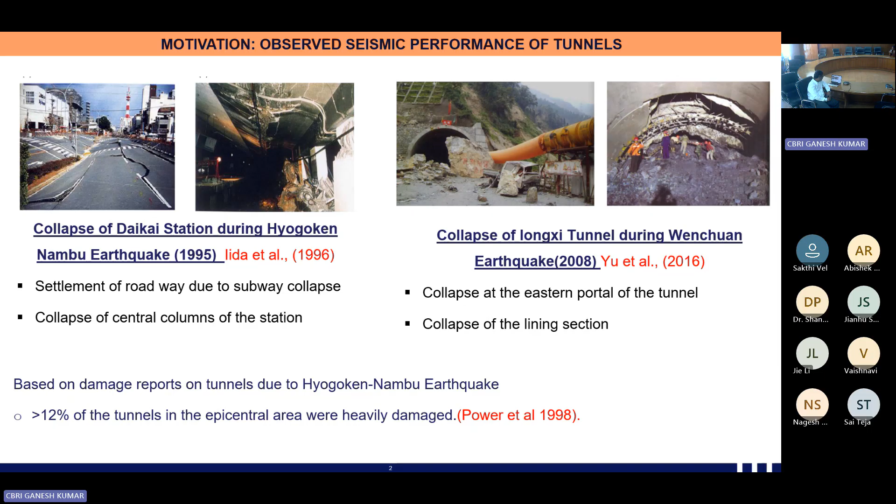So with these two things in mind, we try to understand how the tunnel would interact with soil, and how we can monitor different parameters so that we can address the tunnel soil interaction issue.

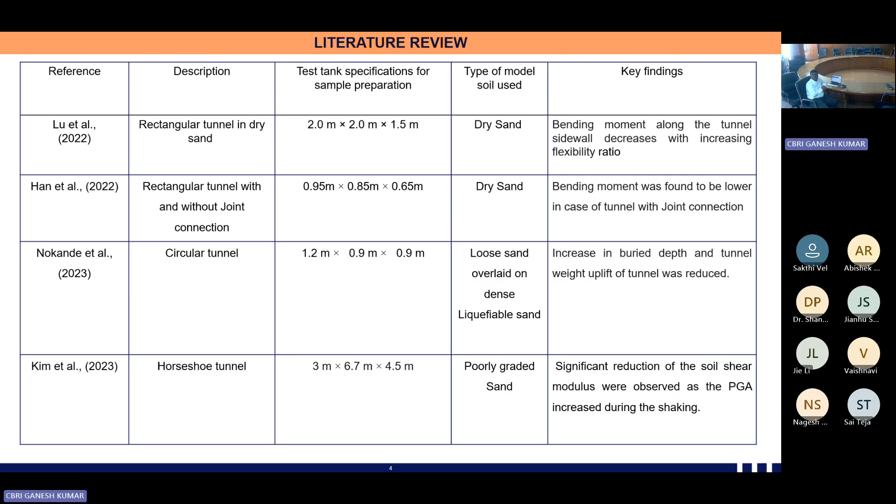So for this, we initially went with a literature review, and found that specifically in experimental studies, mostly people have done their work on dry sand and also liquefiable sand, mostly trying to assess how the bending moment of the tunnel would be affected during earthquake loading. Some of the literature also focuses on numerical studies, where they tried to address how we can reduce the seismicity of the tunnel so that it could be safe.

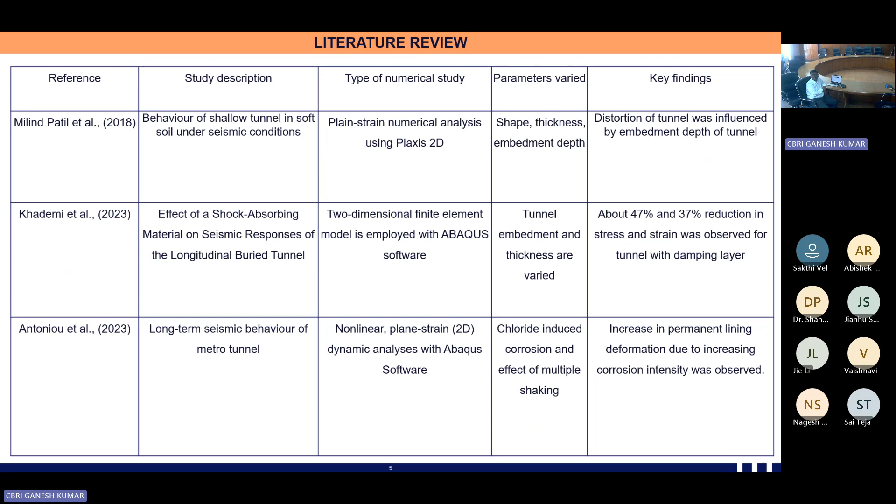So based on this literature review, I came to know that there are limited studies available specifically involving repeated shaking events. In past earthquakes such as the Tohoku earthquake, Kumamoto earthquake, and Kahramanmaraş earthquake, there are instances of how these repeated shaking events have caused catastrophic failure.

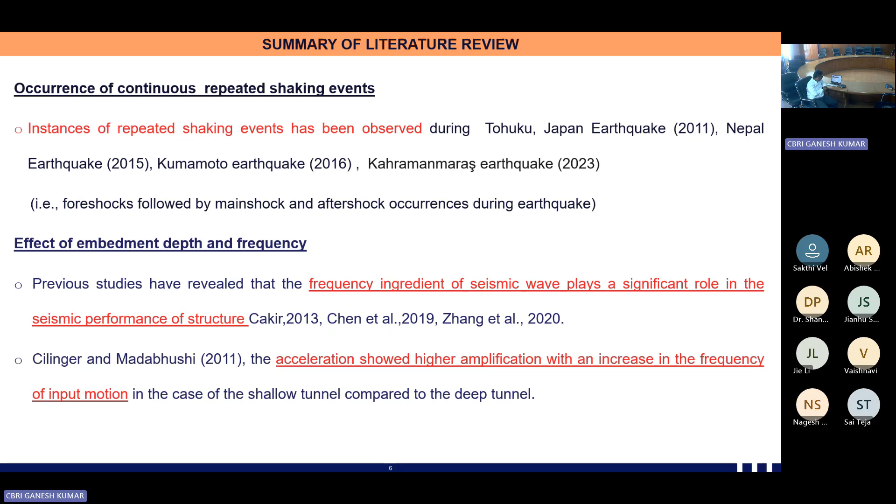We also saw from the literature that the influence of embedment depth together with frequency has played a major role in the dynamic performance of tunnels. So with these gaps in mind, we formulated our objective.

I formulated my objective, where the primary objective is to understand the tunnel soil interaction behavior under dynamic conditions. Here I primarily used the shake table and also numerical analysis. We tried to initially address how the effect of embedment depth and frequency would play a major role in the behavior of the tunnel. After completing this one set of experiments, we moved on to the influence of varying ground saturation, and how this saturation would affect the tunnel soil interaction behavior.

Finally, we moved to numerical validation of our numerical model to investigate how the effect of ground improvement would influence the tunnel soil interaction behavior.

So in test series 1, to address the embedment depth and frequency on the behavior of the square tunnel, two embedment depths with two different frequencies were chosen, with input motion of 0.2G, 0.3G, and 0.4G given as input motion.

These 0.2G, 0.3G, and 0.4G inputs are given one after the other, to replicate how foreshocks and aftershocks would influence the tunnel-soil interaction behavior.

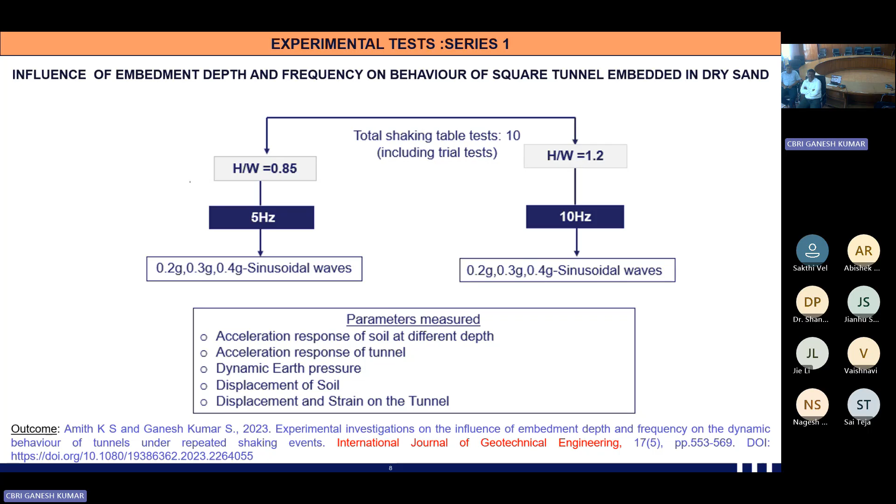In test series 2, we addressed how varying saturation would influence the behavior. For this case, we used 25 to 100% saturation, again with sinusoidal input motion, but ranging from 0.1G to 0.5G.

Further, we also moved to a circular tunnel and addressed the behavior by giving a scaled-down earthquake. All these parameters, such as acceleration response of soil, pore water pressure, dynamic earth pressure, displacement of soil, and displacement of tunnel, have been monitored.

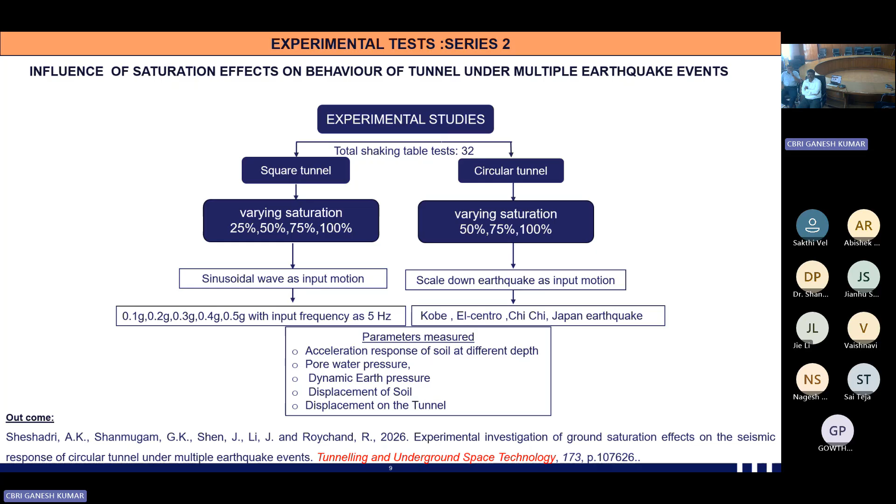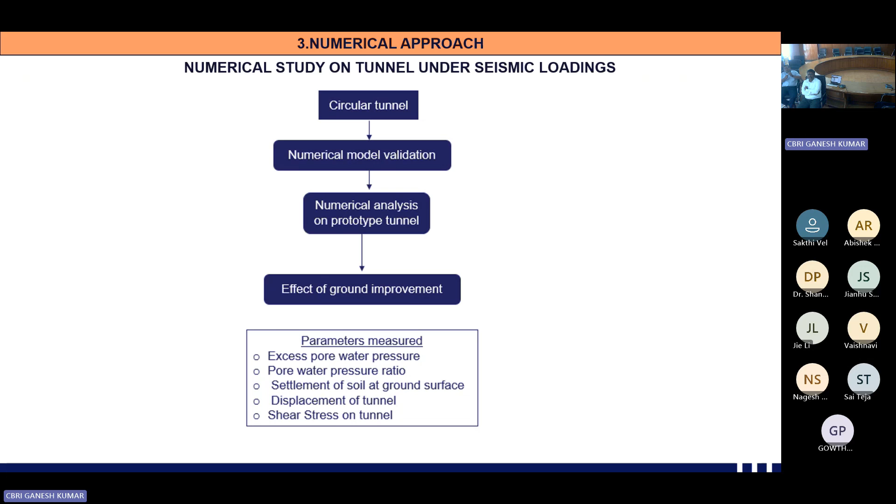To assess the tunnel-soil interaction behavior, after conducting all these tests we moved to numerical study, where initially we validated our numerical model, and then scaled up into prototype dimensions to address how this seismicity can be reduced through ground improvement.

For this experimental study, we have used poorly graded sand with a maximum dry density of 16.7 kilonewtons per meter cube.

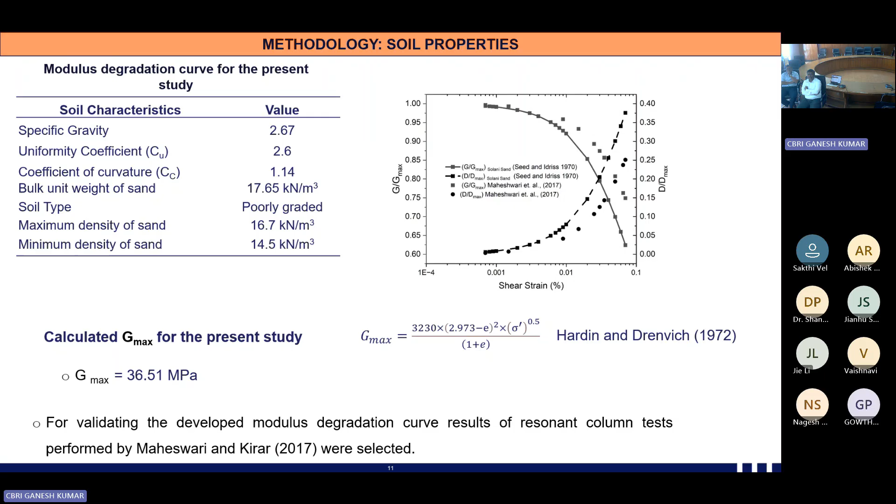We also calculated the G by G max value, which is the dynamic shear modulus, which plays a major role in dynamic tunnel-soil interaction performance. For test series 1, we used a shake table of 2 meter by 2 meter dimension with a payload capacity of 3 tons.

The acceleration range was 0.01G to 1G, with a test tank dimension of 1.7 meter by 1 meter by 0.7 meter. We fabricated our tunnel mold, with dimensions of width 270 mm and length 740 mm.

The tunnel had a thickness of 30 mm, and these are the two setups used.

For the instrumentation details, in order to measure how embedment depth and frequency would influence the tunnel-soil interaction performance, we used 3 accelerometers, 2 earth pressure cells, and 2 displacement sensors in both cases, for height-to-width ratios of 0.85 and 1.2.

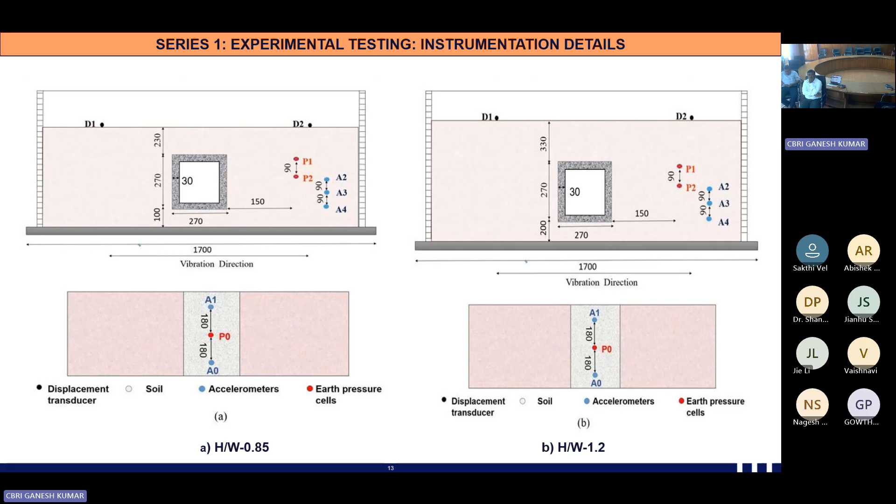While conducting the experiment, we prepared the sample by first placing the tank on the shake table, and then using a hopper to achieve homogeneity of soil preparation.

Until the height of 600 mm was achieved. After preparing the sample, input motion of 0.2G, 0.3G, and 0.4G was used, and subsequently, for monitoring displacement and strain on the tunnel, we used digital image correlation.

This digital image correlation involves speckling of images, as seen in the figure. After speckling, we take a reference image before conducting the test, and during the test we take subsequent images continuously, called deformed images.

The reference image and deformed images are correlated together so that we can calculate the displacement and strain.

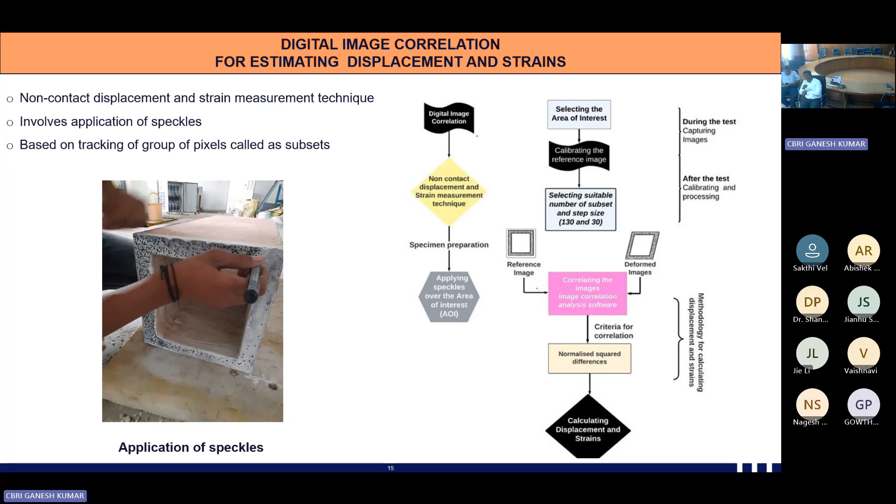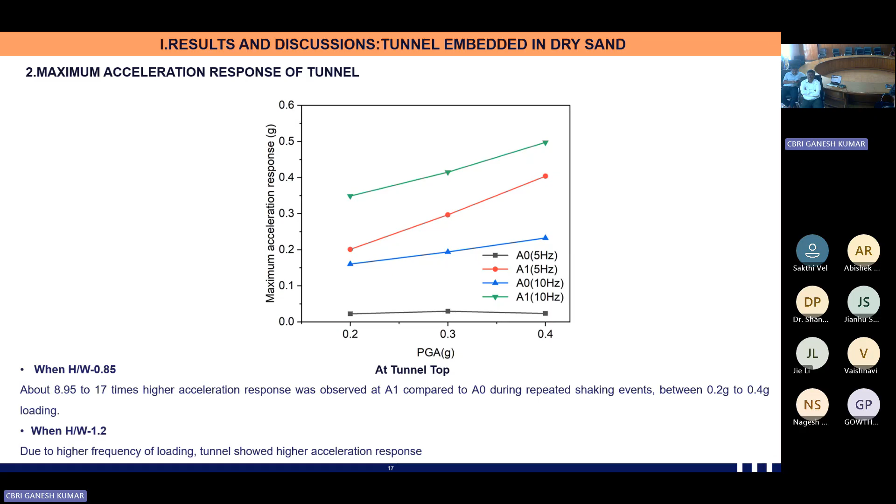For the acceleration response on the tunnel, 2 accelerometers were placed on the longitudinal dimension at the top of the tunnel, and we could see that the front end of the tunnel had higher acceleration response compared to the rear end of the tunnel.

We also measured the maximum acceleration response within the soil, and we can see that because of soil nonlinearity and non-uniform densification, the maximum acceleration response is higher at the top and lower at the bottom.

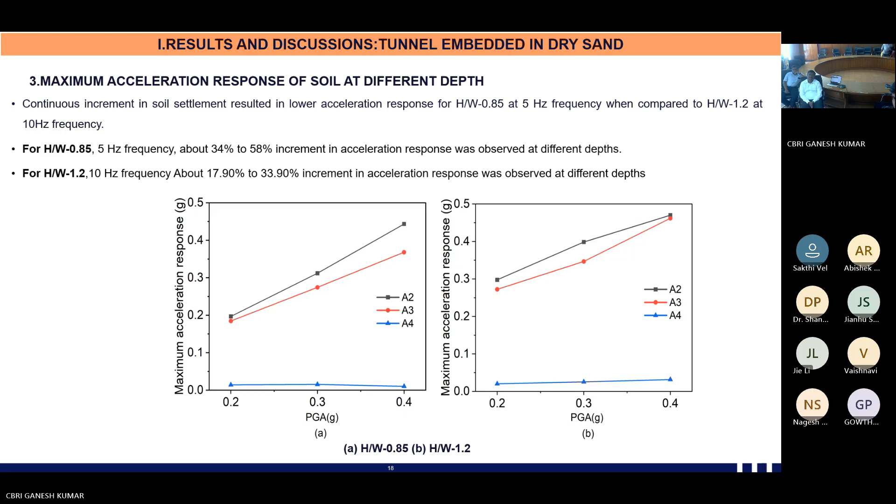Finally, for this objective, the 5 Hz loading frequency during repeated shaking events influenced the increment in soil densification. Because of the load sharing mechanism between the soil and tunnel, about 14.9 to 58% increment in dynamic earth pressure was observed during 0.3G.

And for the 0.4G shaking, dynamic earth pressure reduced. This could be due to the maximum embedment depth and also the overburden cover, which is affecting the tunnel-soil interaction behavior.

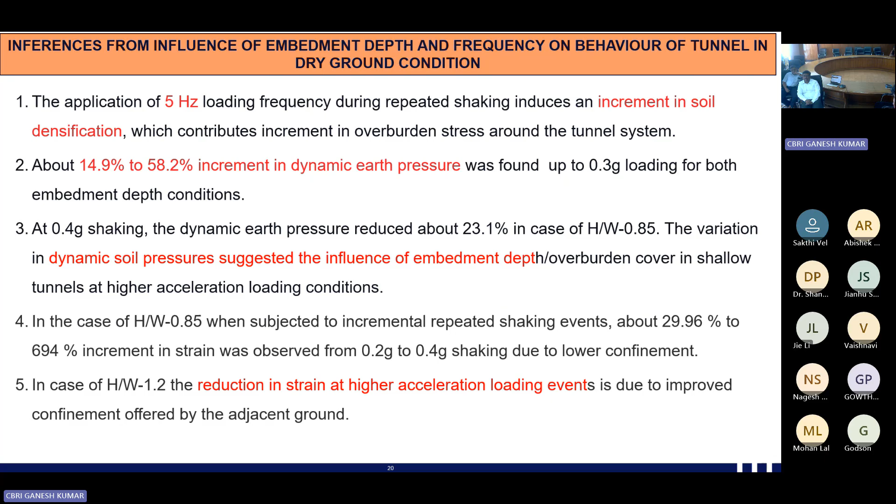Further, for the height to width ratio of 0.85, about 29.96 to 694% increment was observed in strain, meaning that with input motion, because of lower confinement, comparatively higher strain was observed. For height to width ratio of 1.2, reduction in strain is observed, due to the improved confinement offered by the adjacent ground.

After completing this one set of experiments, we tried to understand how the saturation of soil would influence the tunnel-soil interaction behavior. For that, initially we fabricated the square tunnel, and then varied the saturation of ground by theoretically estimating the water content required for achieving the soil sample preparation.

As mentioned previously, 0.1G to 0.5G input motion was used to simulate the influence of aftershock and foreshock events.

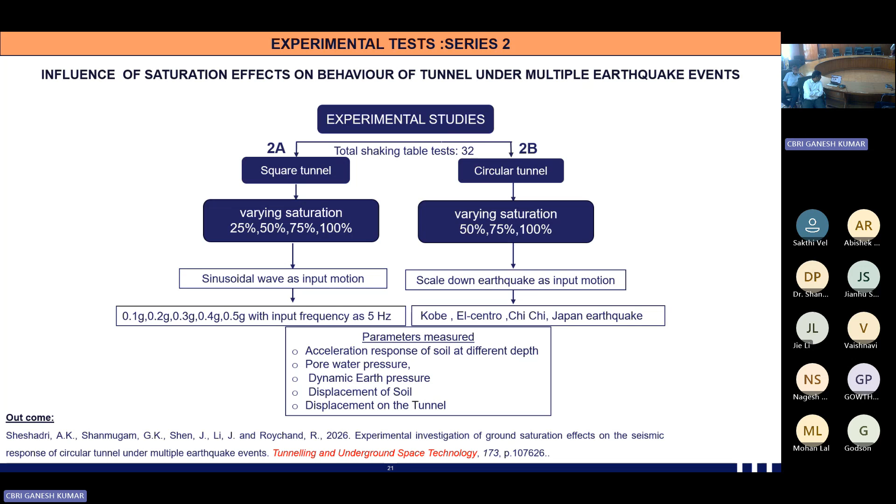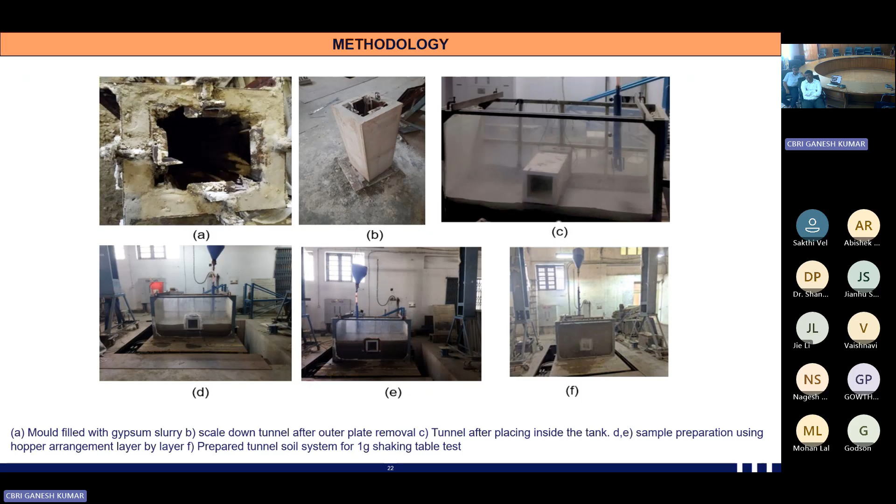For the square tunnel, we molded the sample with 270 mm by 270 mm dimensions, and after sample preparation of one layer, we placed the tunnel, and through wet sedimentation technique, completed the soil sample preparation. Then we used instrumentation of 2 accelerometers, 4 pore pressure sensors, and 1 displacement sensor to monitor tunnel-soil interaction behavior.

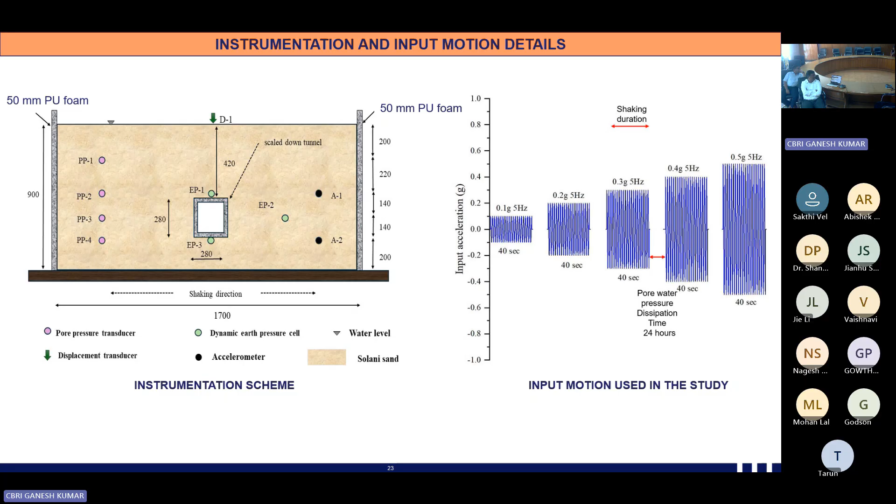The results show that for the 25% saturation case, no significant improvement is observed. Even for 50%, no excess pore pressure has been developed. But for the 0.2G shaking, subsequent loading showed slightly higher pore pressure, although at the top there was no significant pore pressure development.

But for 0.3G and 0.4G shaking, because of shaking history and also higher peak ground acceleration, both together, along with shaking duration of 40 seconds, played a major role in developing higher pore water pressure during 0.3G and 0.4G shaking.

This continued even during 0.5G shaking, and comparatively 75% saturation ground influenced more pore water pressure compared to all other cases.

We could see that because of this development of pore pressure, the displacement of tunnel increased with input motion. Physically we observed a longitudinal crack along the tunnel for the case of 50% saturation, and for the case of 75% saturation, complete collapse of tunnel along with heave was observed.

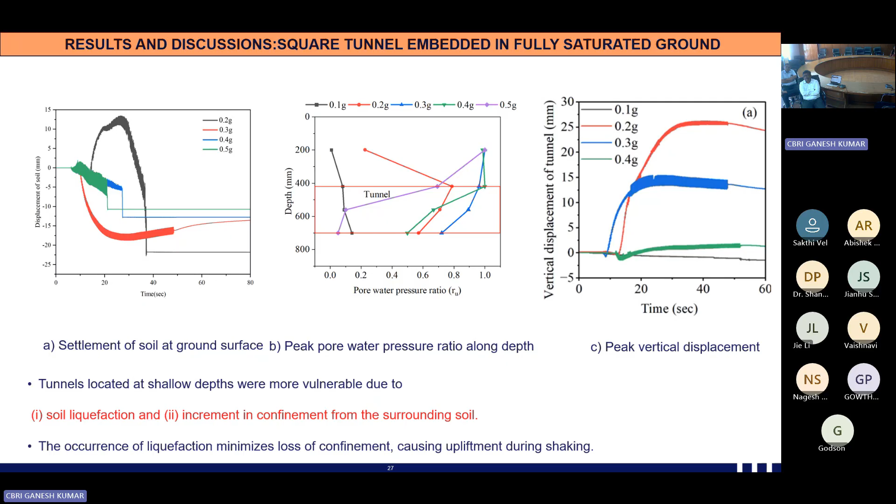But during subsequent 0.2G to 0.5G shaking, because of complete saturation, vertical displacement of tunnel from 0.2G to 0.4G was observed in the case of 100% saturation. Here, primarily, the shallow embedment depth played a major role for tunnel upliftment.

So from this, we could conclude that the influence of shaking history and duration of shaking along with the peak ground acceleration played a major role in increasing the pore pressure response.

Also, for the shallow confinement characteristics and variation in situ stresses, displacement of tunnel increased both with increment in soil saturation and incremental shaking events. But for the case of 100% saturation, complete liquefaction occurred during 0.2G to 0.5G shaking, and the variation in situ stresses caused the tunnel to uplift.

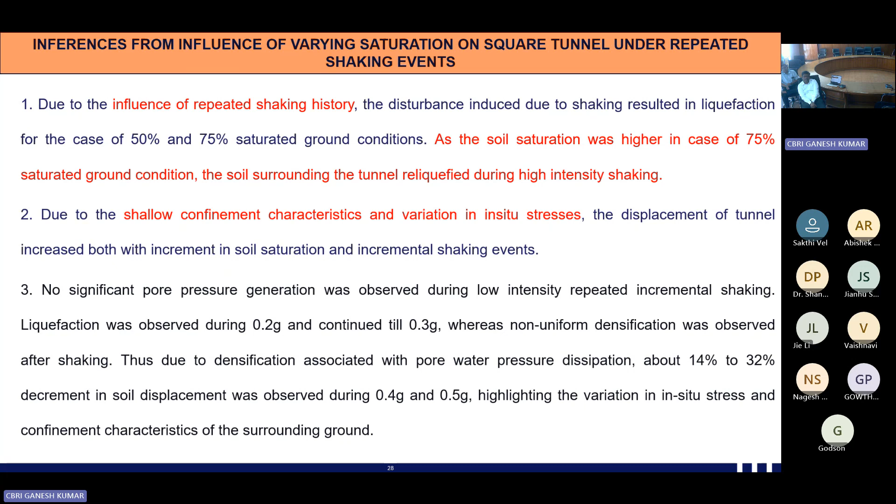After this set of experiments, we moved to understand how scaled down earthquake motion could affect tunnel performance. So instead of sinusoidal waves, we used scaled down earthquake motion, and here also we varied 50 to 100% saturation as test cases.

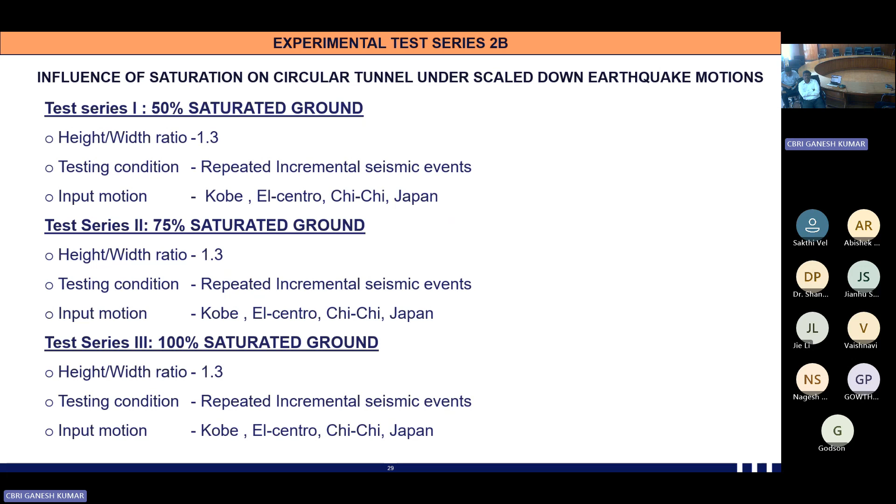Further, we fabricated our tunnel model of dimension 195 mm internal diameter and 245 mm external diameter, with the length of tunnel as 740 mm.

In order to scale down this tunnel, scaling laws were used, and accordingly, the time of input motion and frequency was scaled down and given as input motion.

These are the instrumentation details where 4 accelerometers and 4 pore pressure sensors have been used, along with 2 displacement sensors.

We also prepared the soil sample similar to the previous cases, where until the desired height of 850 mm was achieved, we prepared the sample with calculated water content.

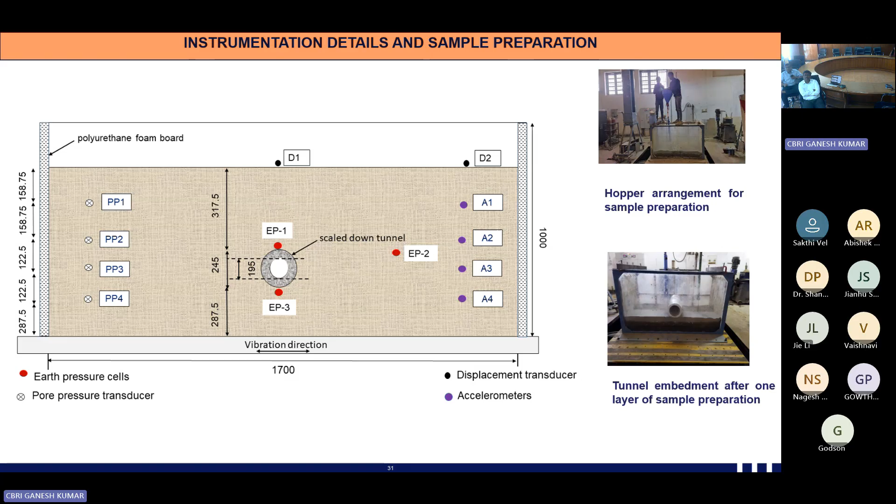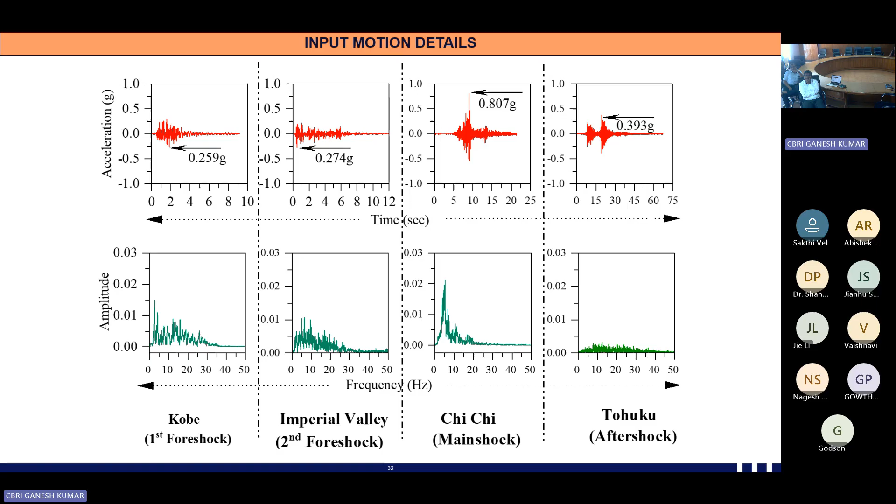This figure shows the input motion details, where in order to replicate two foreshocks, a main shock and aftershock events, we have used the Kobe earthquake, Imperial Valley earthquake, Chichi earthquake, and Tohoku earthquake. Here we can see that incrementally the duration is increased from Kobe to Tohoku earthquake.

After conducting the experiment, we could see that at the tunnel embedment depth, a slight reduction in acceleration response has been observed, and also the 100% saturation test cases tend to liquefy, due to which lower acceleration response was observed. The primary reason for reduction in acceleration response is that at mid depth, disturbance due to shaking causes densification, due to which slight reduction in tunnel's acceleration response has been observed.

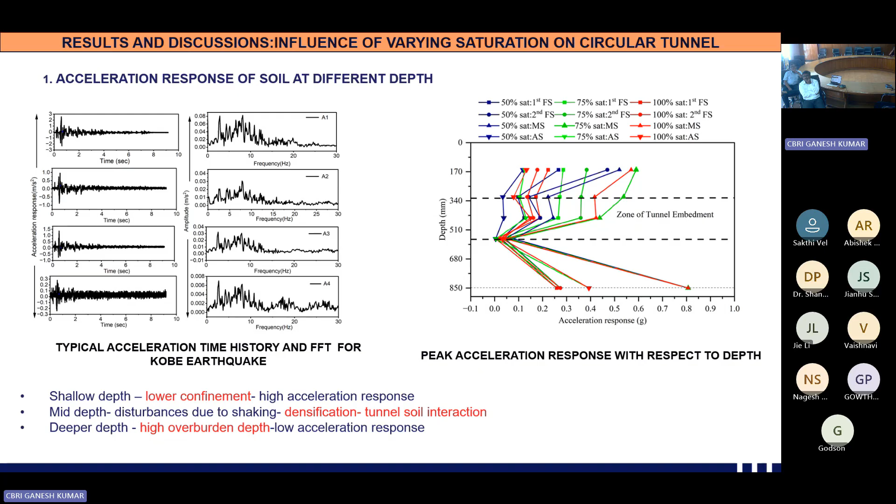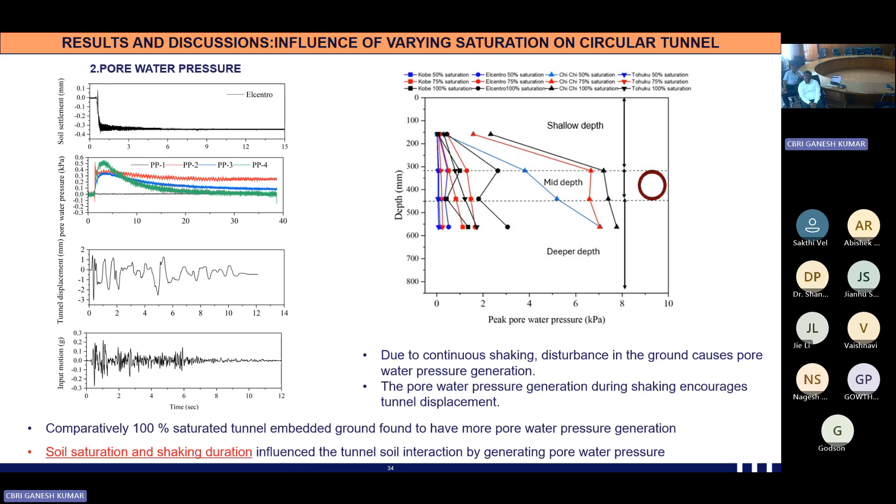These tunnel-soil interactions could also be interpreted using the pore pressure response, where from top to bottom the pore pressure is increased, primarily due to the overburden pressure. We measured the displacement of tunnel, and we could see that for the initial case of Kobe earthquake, not much significant displacement was observed.

For the case of the Tohoku earthquake, comparatively lower displacement is observed. This is primarily due to the influence of shaking history, which influenced the densification of ground during the main shock event, due to which lower displacement is observed for the case of Tohoku earthquake.

From these results, we can conclude that primarily the shaking duration and also the peak ground acceleration along with the shaking history played a major role, and the soil saturation significantly influenced the dynamic performance of the tunnel. From the estimated pore pressure ratios, it is evident that the influence of saturation is affecting the tunnel-soil interaction performance, which significantly led to soil liquefaction.

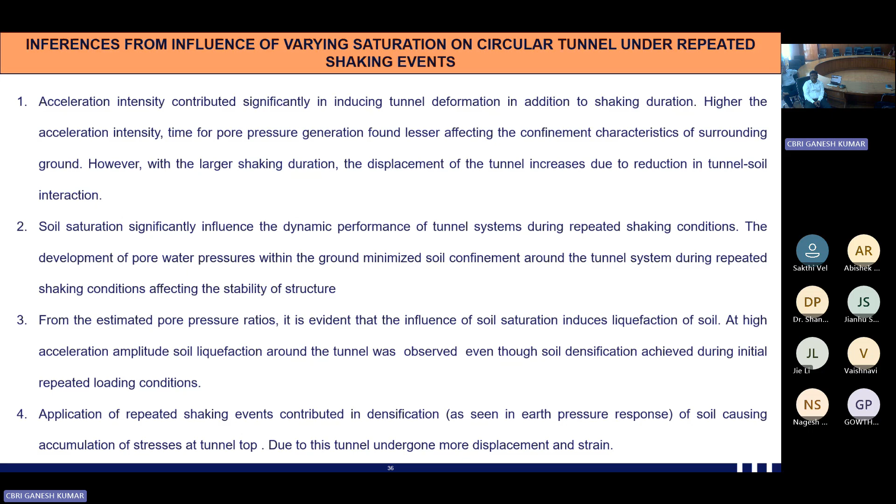This is the end of the test series through experiments, and after completing all this, we moved to the numerical approach, where we validated our numerical model through the UBC3D-PLM model, and we measured parameters such as excess pore pressure ratio, settlement of soil, and displacement of tunnel, similar to the previous cases.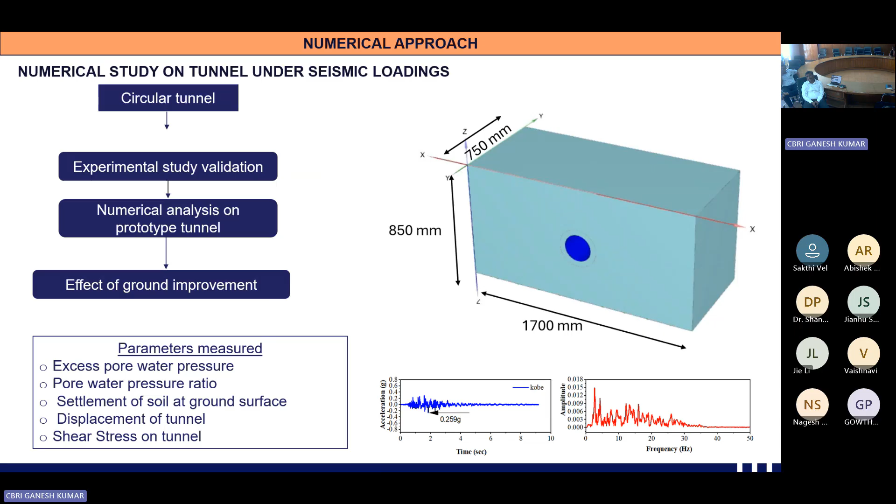For conducting this numerical study, we used an interface reduction factor of 0.66 between the tunnel and the surrounding soil. To model the tunnel, we used a plate element, and the parameters associated with the constitutive model were calculated based on the SPT N value, which is correlated with equations given in the Plaxis 3D tutorial or constitutive material model manual.

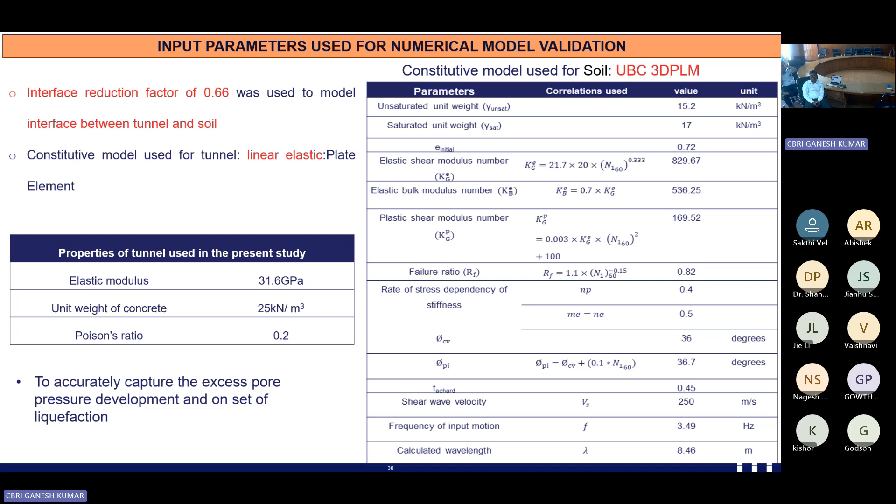After calculation of all this, we did several trials and arrived at a certain set of results, where we could see around 10 to 15% variation between the numerical model and experiments.

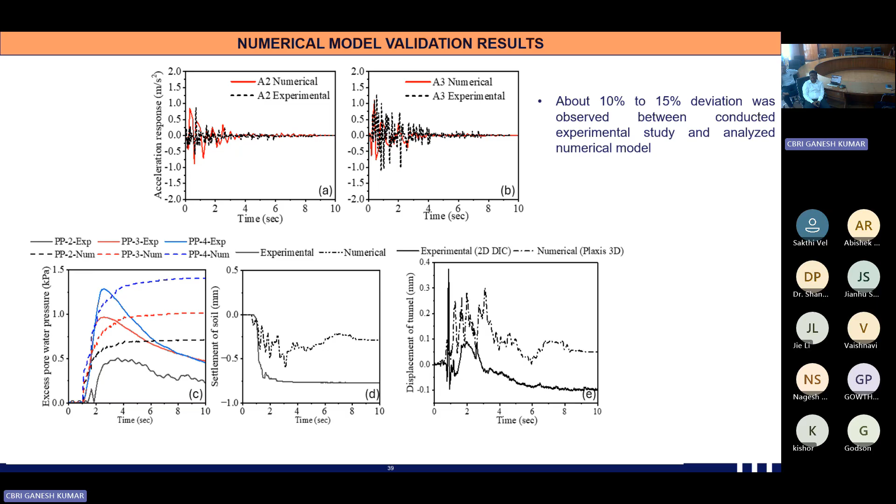After validating the numerical model, we moved to scale up the model, and according to a scaling factor of 1:20, we converted everything into the prototype. We tried to apply the boundary conditions of a viscous boundary along with a compliant base at the bottom in order to simulate the dynamic input motion. These Rayleigh damping coefficients were calculated based on the wavelength of the input motion.

Similar to the validated model, we calculated the input parameters required for modeling the tunnel.

To reduce the seismicity of tunnel along with the soil, we used stone column technique, where all the parameters have been calculated based on the SPT N value, which I mentioned in the initial slides, and Poisson's ratio of 0.2 with elastic modulus of 3 x 10^4 MPa have been used for the tunnel model.

This is the stone column configuration we used, where for 5 meter and 10 meter depth, two variations were done, and two rows of columns and 8 rows of columns have been installed, and we tried to see how we can reduce the upliftment of tunnel which we observed in previous experiments.

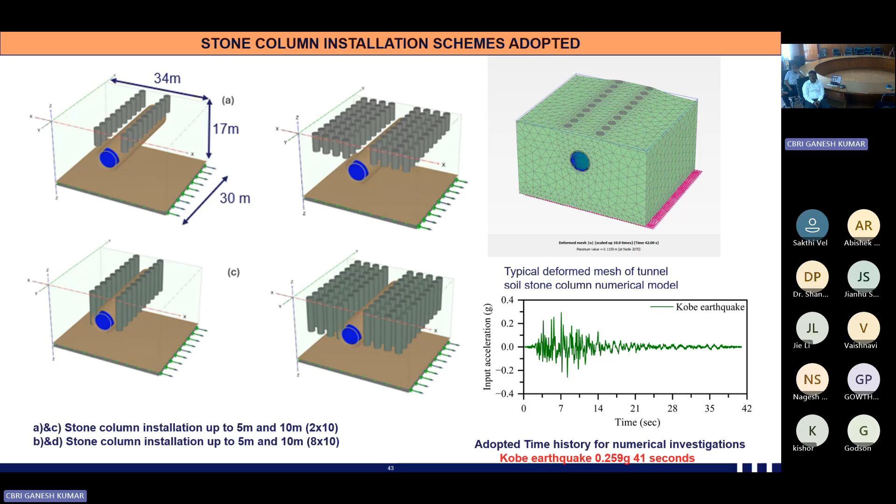We can see here that for the case of 10 cross 2 configuration, no much reduction in soil settlement is observed, but for the case of 10 cross 8 arrangement, we could see drastic reduction of up to 39%.

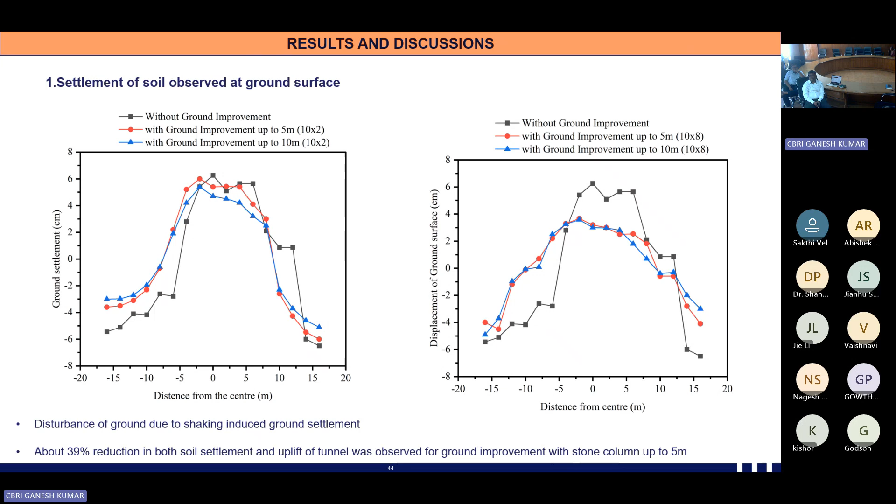But for the case of subsequent 10 meter depth, although up to 10 meter we could see reduction in pore pressure, still at the bottom there was no significant improvement.

So further, we varied our stone column configuration where for the case of 5 meter, there was no improvement, but for the case of 10 cross 8 configuration for 10 meter depth, stone columns installed at 10 meter depth, almost significant improvement was observed.

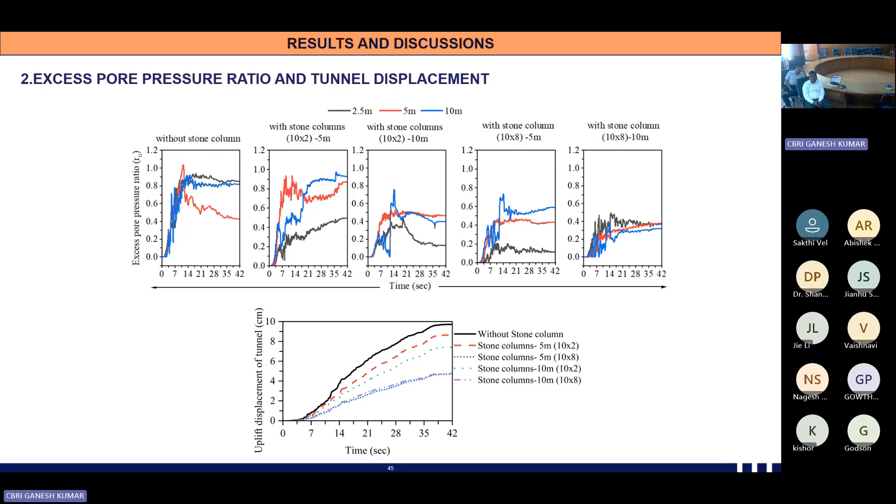This can be validated through the displacement of tunnel, where for the case of stone column installed at 10 cross 8 configuration, it significantly reduced the upliftment of tunnel. So from this numerical investigation, we could see that 10 cross 8 arrangement is ideal if we install the stone column up to 10 meter depth.

The major conclusion from this research is primarily for the case of dry ground conditions, both frequency and shaking history and embedment depth play a major role. And due to the influence of shaking history and longer shaking duration, for the case of varying saturation ground, development of pore pressure has taken place.

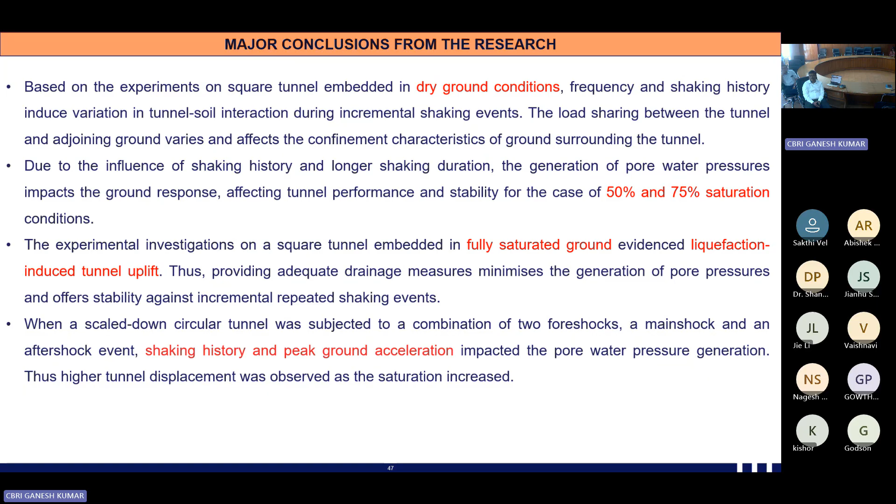And for the case of fully saturated ground, this has induced tunnel uplift, which we tried to address in our numerical study. For the case of circular tunnel subjected to a combination of foreshock, aftershock, main shock, and aftershock events, primarily shaking history and peak ground acceleration were major factors affecting tunnel displacement.

From this, we can also say that through numerical study, both densification and drainage effect of stone column can be used effectively to mitigate the tunnel uplift and improve the performance of tunnel.

We have just started exploring how we can use numerical simulations effectively to simulate ground improvement, but still more work is required where the spacing of stone column, influence of stress concentration ratio, and several other factors have not been considered in our study.

Also, the validation has only been done for a single earthquake, but we can also consider multiple shaking events in our numerical study to further enhance our work.

There are some future scope of my present work, where the observed performance or parameters can be used for understanding real-time monitoring of tunnel structures.

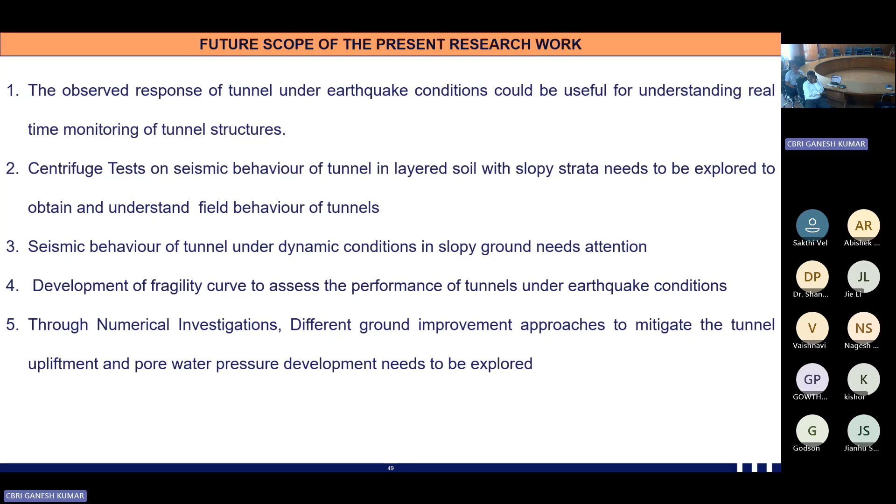We can also develop a fragility curve based on the conducted experimental study and numerical simulations, and we can come up with the vulnerability characteristics of these tunnels.

These are some outcomes of our research, where initially the review paper was published in European Journal of Environmental and Civil Engineering. Then one research paper was published in International Journal of Geotechnical Engineering. Further, recently my work on circular tunnel under multiple shaking events was published in Tunnelling and Underground Space Technology.

One more paper is currently under review, where we revised and submitted our manuscript to the Journal of Earthquake Engineering.

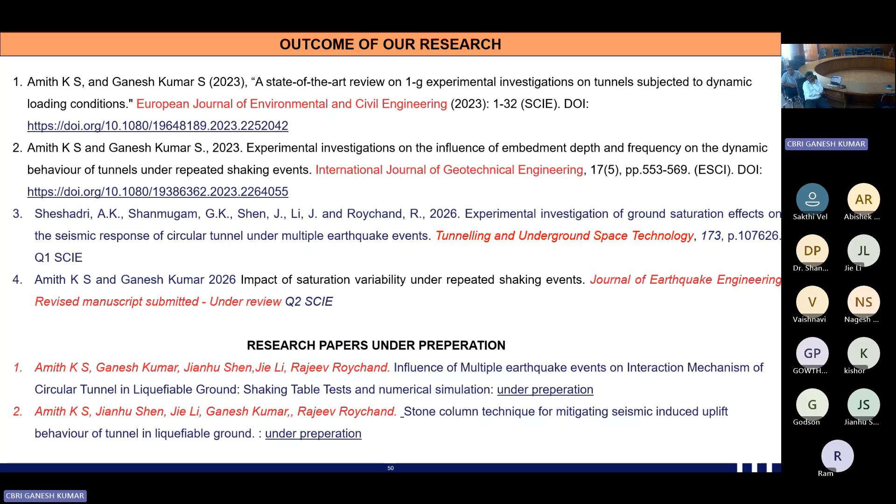Two more papers are under preparation. Three book chapters I have completed by attending conferences, and I have also got 3 conference papers. With this, I would like to conclude my topic on tunnel soil interaction behavior.

I would like to thank all of my supervisors, both at AcSIR and RMIT, along with LAC members, director, HOD and scientists at CBRI. I would also like to thank our thesis examiners for giving me significant review on how the thesis can be improved.

I would also like to thank the technical support given by the BIS company for shake table facility, along with Abhishek, director of Pyrodynamics, who helped me understand how DIC can be effectively used for measuring displacement and strain. Also, in validating on the online platform I came across a lot of difficulty, so people from Bentley helped me online, and a lot of discussions occurred. I would also thank them.

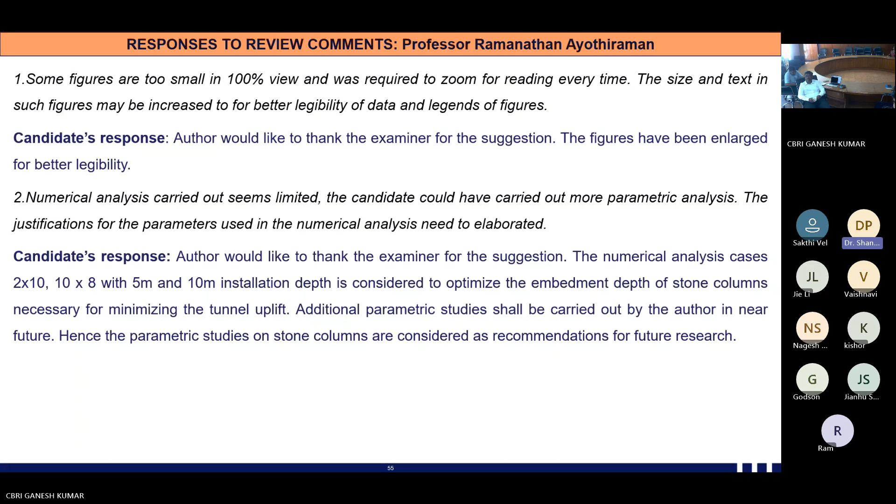Can you show your model test diagram? And can you tell me how much space is there along the longitudinal direction of the tunnel?

In this figure, the placing of tunnel figure, you can see that 2 accelerometers have been placed. Along the length direction of the tunnel, from the boundary to the tunnel boundary, what is the distance you have allowed? Professor, are you asking about the distance between the accelerometers or from one end to the other end? One end to the other end. One end to the other end is 750 mm. And in between, you have to put something — what is that?

That's a kind of membrane where to arrest the significant disturbance, we try to use that one, but still we could not able to control the movement.

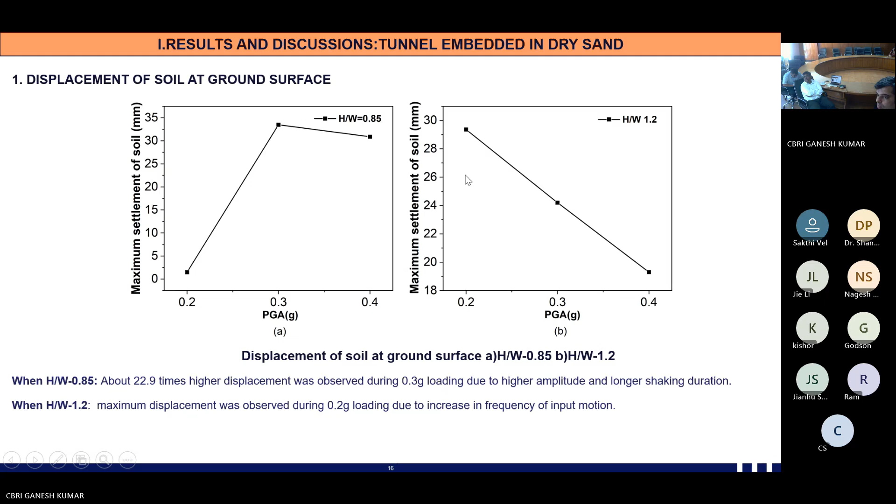Can you show that with your cursor, the distance you are telling? From this end to this end, the distance is 750 mm. And where does your tunnel end? It is attached to the perspex wall.

In that case, how is it a three-dimensional model? It's not, it is a plane strain model. Actually, even though it can be considered as a plane strain model, here we have given some liberty to movement. We have not completely arrested the tunnel movement. Before conducting these tests, we did several other tests where we tried to reduce the movement, but still we could not arrest it. We tried to simulate the plane strain condition, but physically it was not possible to arrest the movement completely. So because of the overburden soil and the continuous shaking of around 40 seconds, we observed variation in acceleration response between two locations.

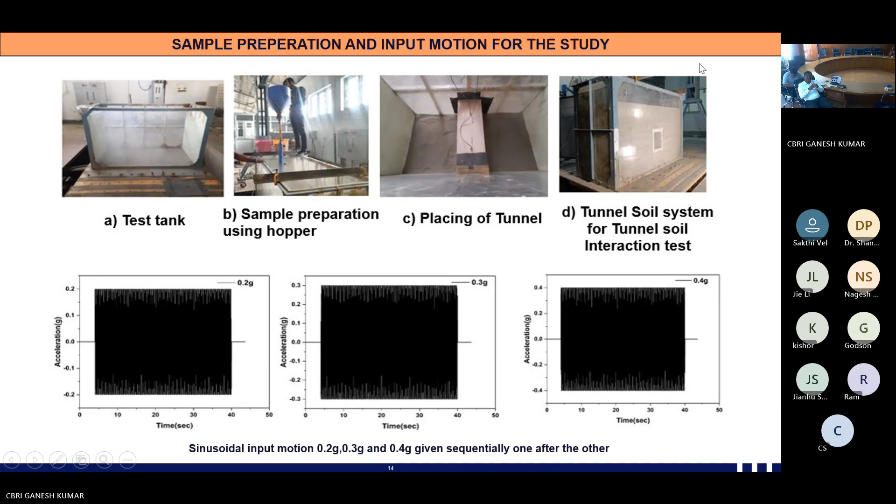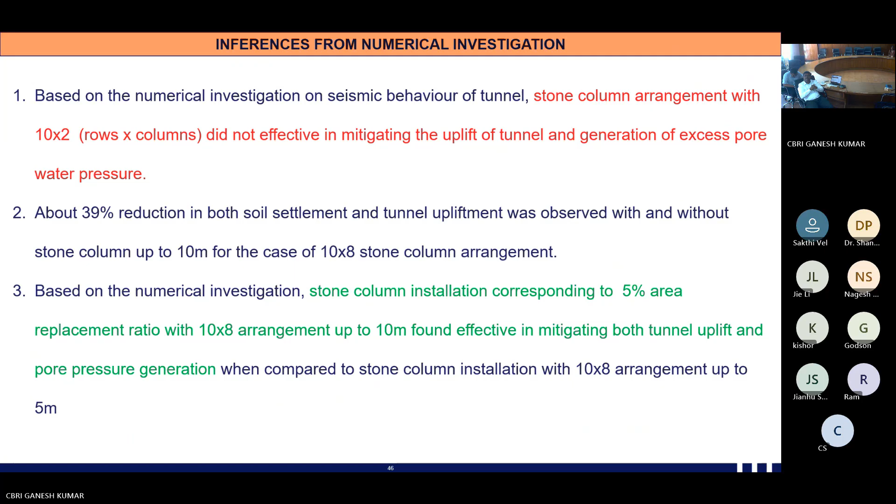Why were two different scales selected for the circular and square tunnel? Please provide justification.

Actually Professor, for the square tunnel, we initially fabricated it at 30 mm thickness, and the mold which we used, we could vary the thickness. But when it comes to circular tunnel, we attempted to reduce the model. We attempted initially to go for a 1:10 ratio only, but here the problem is in field conditions, the thickness of the tunnel will be around 500 mm. So if you want to scale for 1:10, it was not possible for us. That's why just to replicate the field conditions, we used a 1:20 ratio.

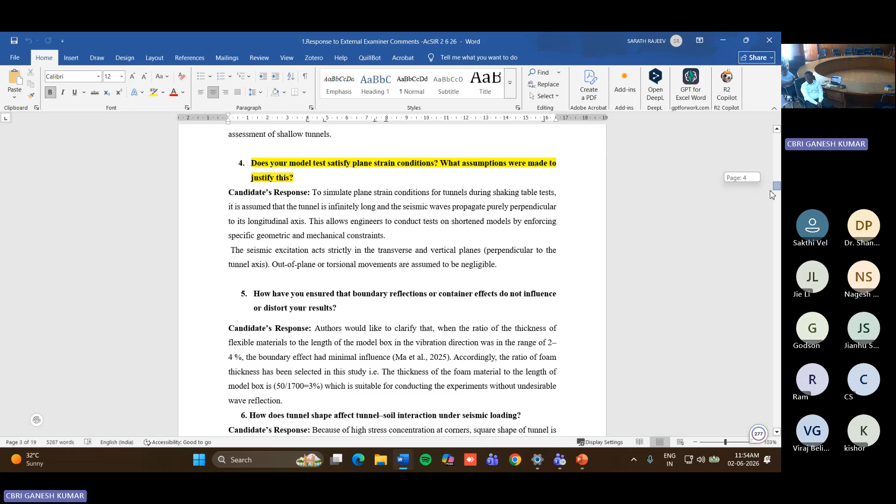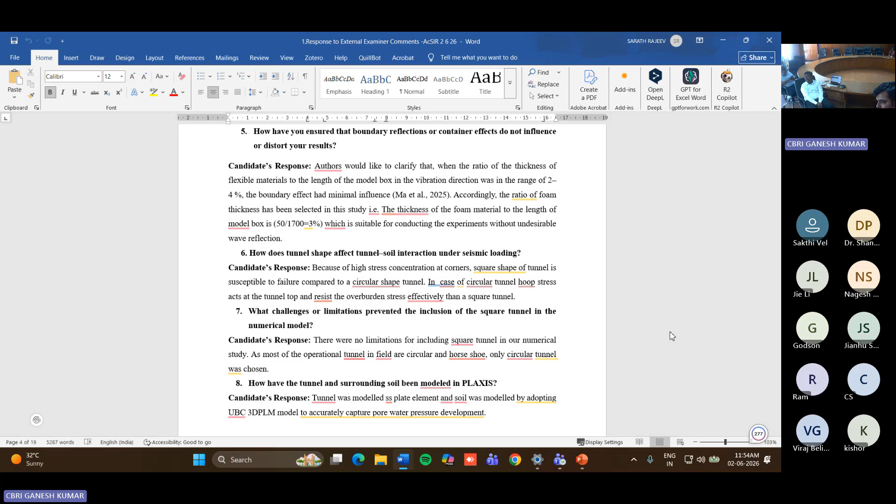How have you ensured the boundary reflections or container effects? Can you able to see, Professor? Yes, yes, you can make it a little bit full scale. Yeah, fine, this is fine.

As I told earlier, the boundary reflections were arrested based on the equations available through Lombardi, where we can calculate the estimated thickness and see how this boundary effect can be reduced. That is one part. And the second part is, in the literature, the ratio of foam thickness to the length of the model, if it is not greater than 3%, it means there will not be any undesirable wave reflection. This is the reason why the boundary effect was not found in this.

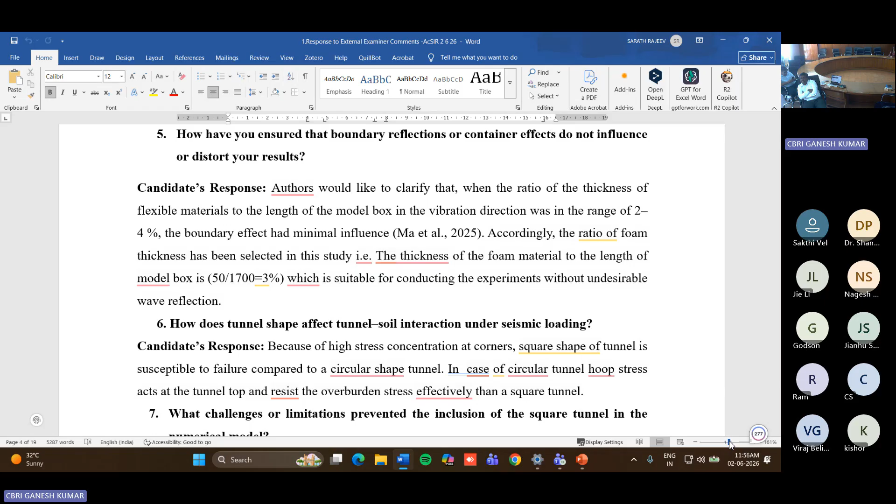And how does tunnel shape affect tunnel-soil interaction under seismic loading? I think this is the future work which you suggested previously that we will be addressing. But in order to answer this question, the square tunnel will have a higher vulnerability than the circular tunnel under seismic loading. That only I can say, because I have not identically compared all my input parameters, everything, by considering the two shapes. So this will be future work, Professor.

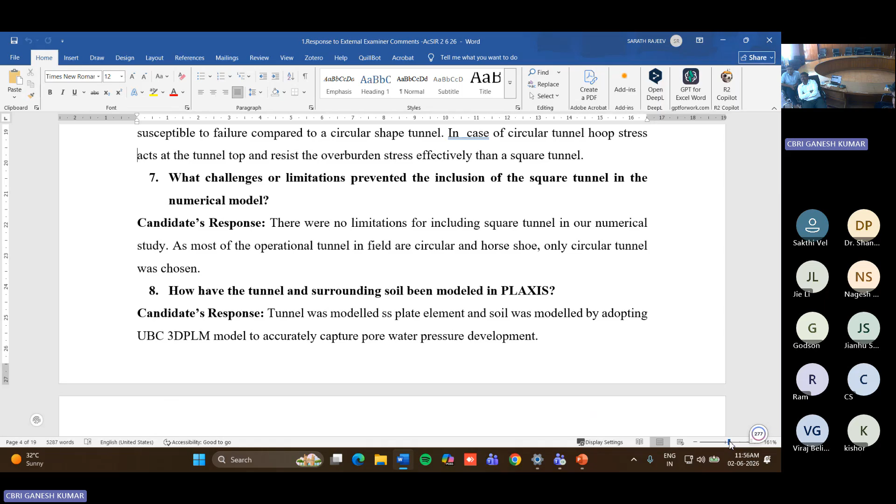And what challenges or limitations prevented the inclusion of square tunnel in the numerical model? This was told in the previous question. Yeah, okay, you can skip that.

How have the tunnel and surrounding soil been modeled in Plaxis?

Tunnel has been modeled as a plate element, and for soil we used the UBC 3D PLM model. This has primarily been used to measure the excess pore water pressure. Only this model is effective in PLAXIS, so this model has been used.

What is the basis for selecting only 4 earthquake time histories for your study? The primary novelty of my research is to see how foreshock, main shock, and aftershock events would influence the tunnel-soil interaction behavior. This is the central part of my study, where for all cases I have tried to address this. So this is the reason why only 4 earthquakes have been selected and simulated in my experiments.

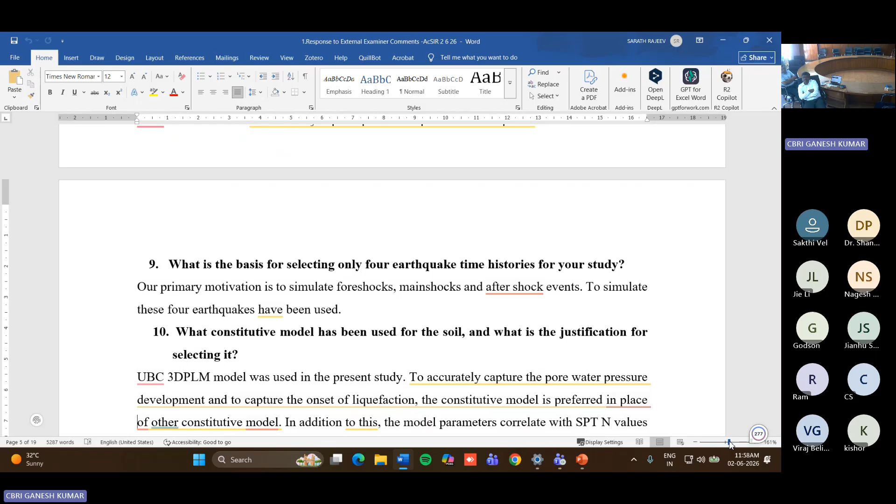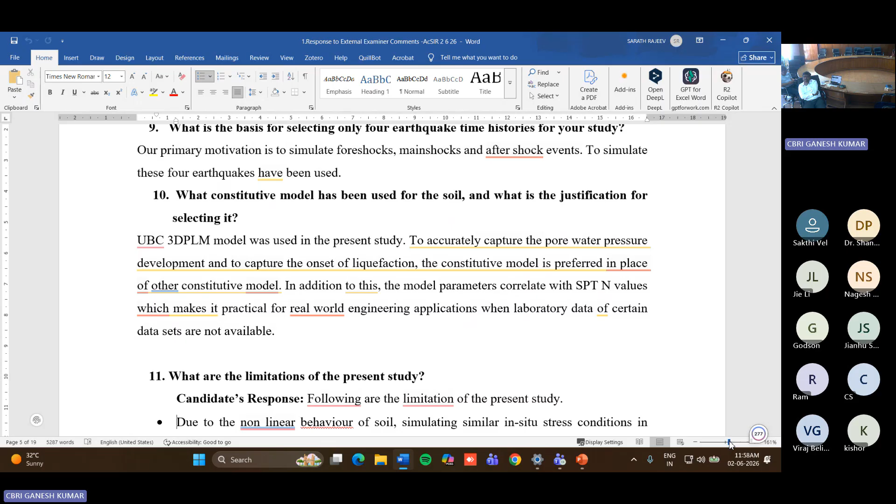What constitutive model has been used for the soil, and what is the justification for selecting it? Before validating our numerical model, I also tried the hardening soil model and the Mohr-Coulomb model, along with the UBC 3D PLM model. In Mohr-Coulomb and hardening soil model, we could not effectively measure the pore pressure, and whatever we did showed comparatively much higher variations. When I tried with the UBC 3D PLM model, comparatively lesser variation came when compared to the experiment. So this is the reason why I selected the UBC 3D PLM model.

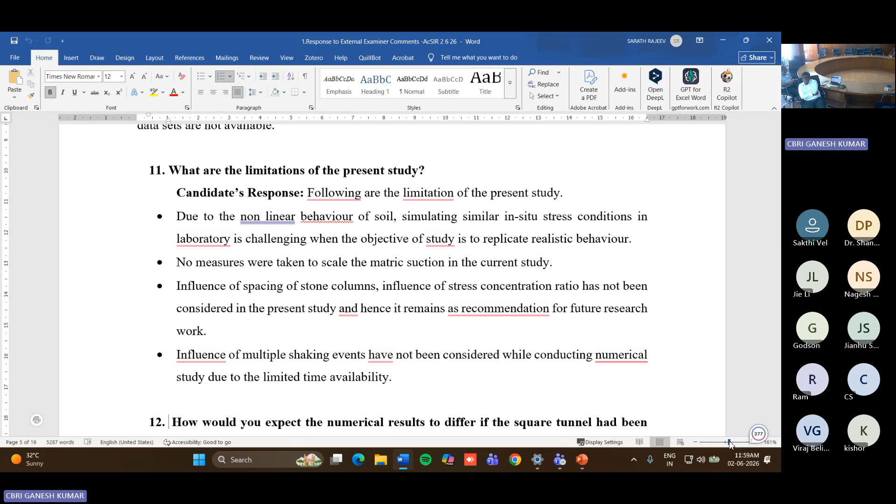What are the limitations of the present study? As I included in the previous slide, simulating the in-situ stresses is difficult, and scaling of the matric suction has not been done. Influence of spacing, influence of stress concentration ratio, these things can be addressed. This is one of the limitations, and influence of multiple shaking events has not been considered while conducting the numerical study.

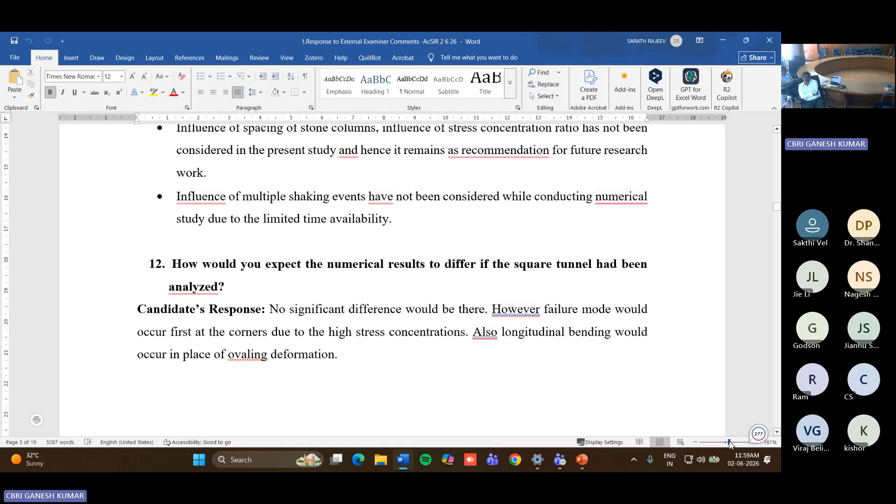How would these limitations now be added in your thesis? Yes, Professor, it has been included.

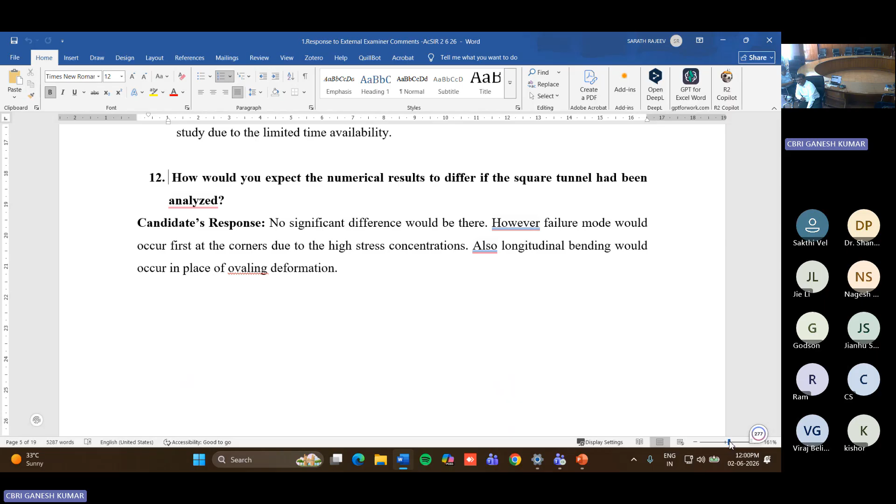How would you expect the numerical results to differ if a square tunnel had been analyzed? In my perspective, there will not be much variation, but the longitudinal bending would occur in place of ovaling deformation, because in the case of a circular tunnel, ovaling deformation occurs, and for the square tunnel, because of higher stress concentration ratio, there will be longitudinal bending.

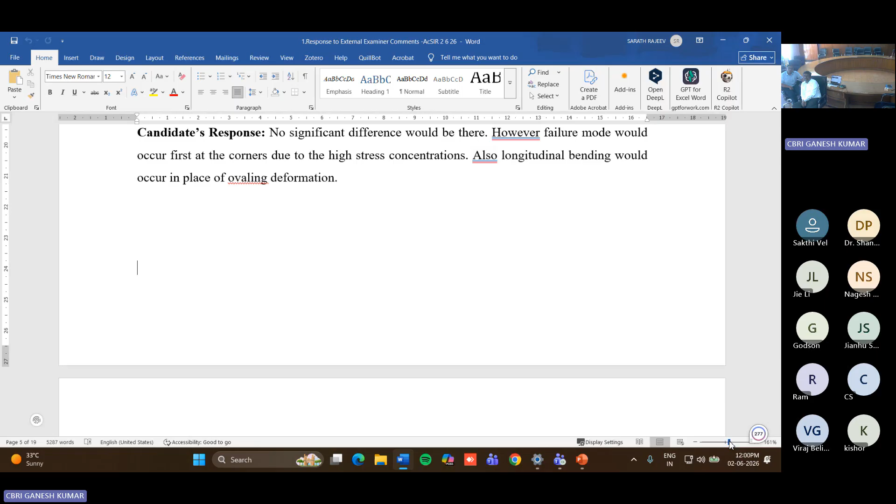So in which condition do you think the cross-section thickness should be more, circular or square? Circular, Professor. Circular sections should have thicker sections compared to square, you are telling? Are you asking about the thickness? Yeah, the structural thickness of the tunnel section.

Square tunnels must have lower thickness, because when we reduce the thickness, the flexibility ratio will also increase, and it will behave like a flexible material. But when we increase the thickness, it will act as a rigid material. So thickness should be less for the square tunnel.

Are you sure about that? What about your shear criteria? Professor, this part, whatever I informed previously, I got to know through literature only, and we can come up with the exact answer only if we do certain sets of numerical analysis or experimental study. Okay, you can think about it later on. You can move on to the next.

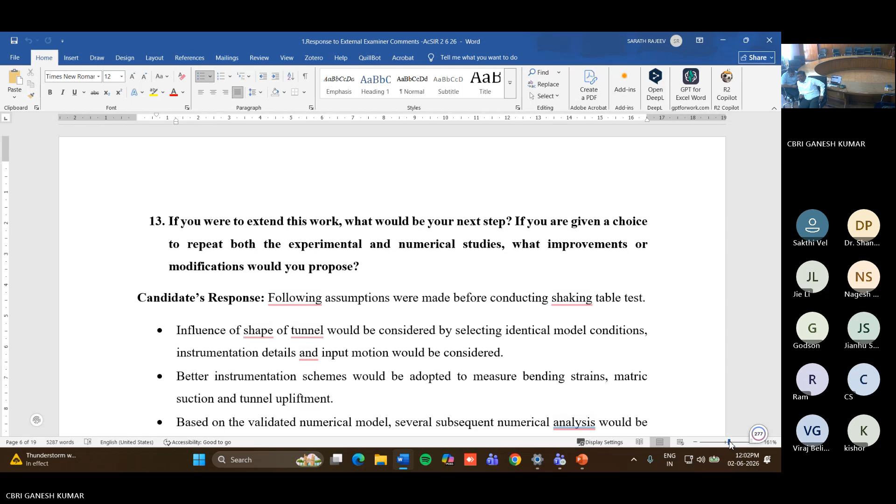If we were to extend this work, what would be your next step? If you were given a choice to repeat both the experimental and numerical studies, what improvements or modifications would you propose?

As told in the previous few slides, I will include the influence of shape of tunnel, and instrumentation to measure the matric suction can be used to address the gap of partial saturation. The numerical model can also be validated with a square tunnel, and I can extend this work through influence of spatial variability, since no other numerical study has been conducted significantly on that. So these are the primary parts that can be included in my future improvement.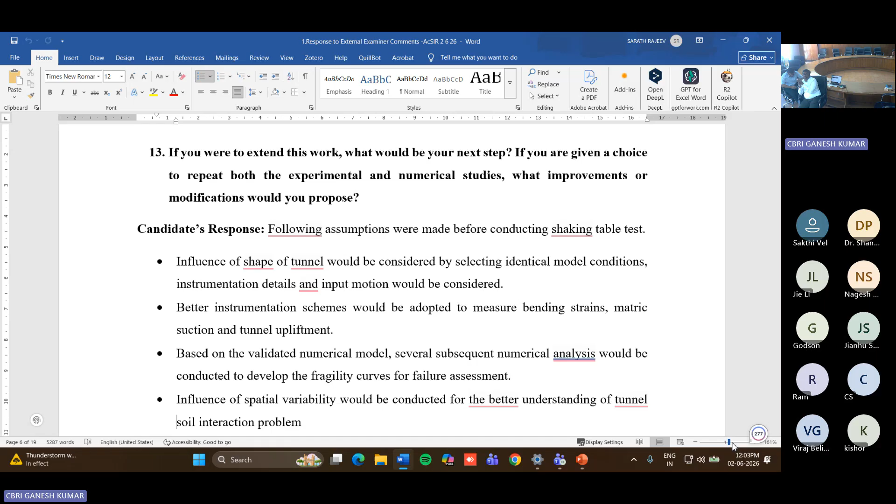But what you are suggesting, if you include it, your time to complete the PhD will be extended. So without extending, what is the possibility? If I want to filter all these answers, I would go for better instrumentation to reduce the time.

The only thing is, we have not effectively addressed how partial saturation would affect the tunnel-soil interaction behavior. We have just theoretically calculated the partial saturation value, and according to the water content, we tried to prepare the sample, but in actuality air voids also play a major role. That can be done only when we use proper instrumentation to measure the matric suction. So that will be a kind of gap as of now.

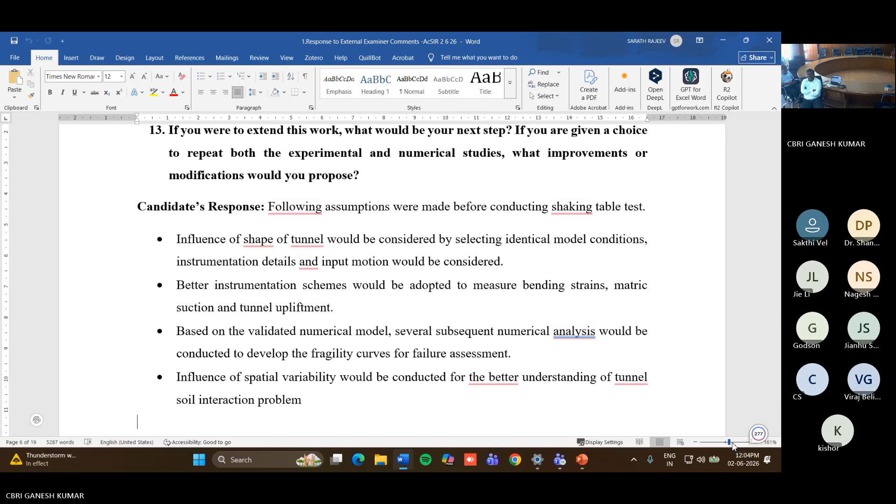Is that the last question? Done? Yes, Professor. Okay. So in addition to that, I have some more queries, not questions.

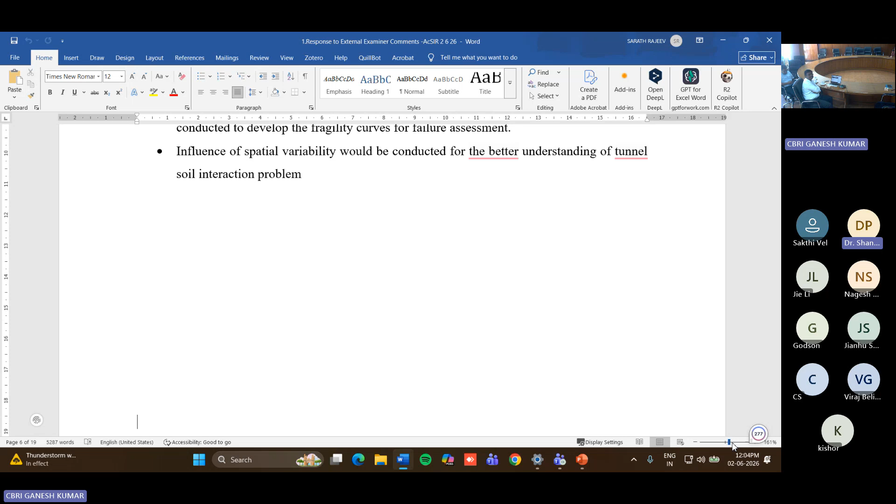From your presentation, I saw that you have considered H upon W, the height or depth to width ratio. You have considered two ratios, 0.85 and 1.2. Why these two magic numbers? Is there any specific reason?

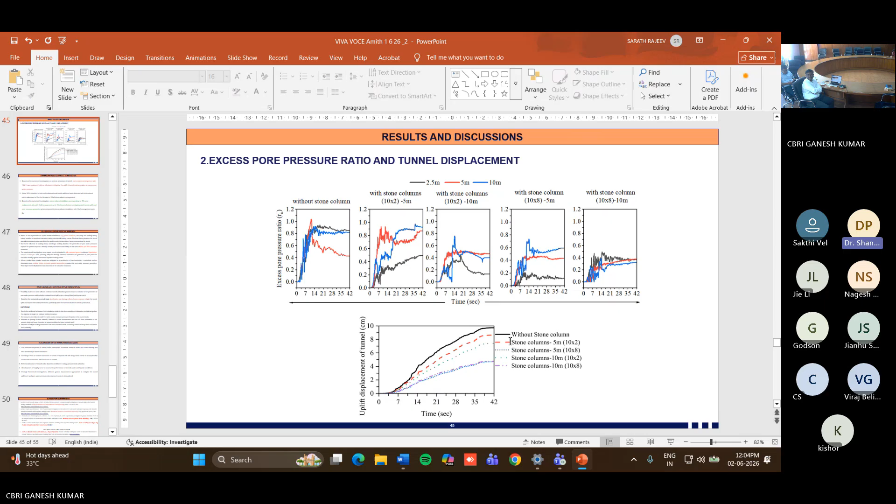The primary reason for selecting only these two height to width ratios is because if we increase the height to width ratio beyond 2 in field conditions, it will replicate a deeper tunnel. Our only focus is to replicate the shallow tunnel. We also have constraints of shake table height, where we can only achieve up to 1 meter or 900 mm depth. This is why only two embedment depths have been considered as of now.

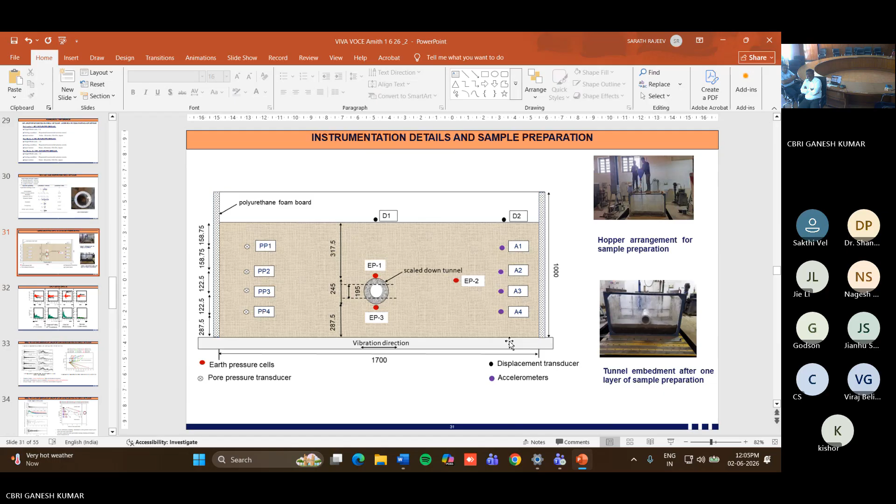Okay, in one slide I saw you have also considered 1.3. Is that right? Yes, Professor. Actually, our focus is primarily, irrespective of the embedment depth, we wanted to achieve a relative density of 52%, which can replicate 72% equivalently in the field.

And when we look into the square tunnel, we have achieved 900 mm depth, and there also in field conditions the 72% relative density is achieved. Here, more than the embedment depth, the relative density primarily plays a major role while preparing the sample.

Okay, so how many relative densities have you considered in your analysis? I have only considered 52% relative density for the experiments, Professor. 52%, and what is the equivalent density for the field? 72%. Have you considered any particular site condition in mind?

I did not understand, Professor. Could you please repeat? Is the 72% relative density related to any site-specific value? No, it's not a site-specific value. We wanted to simulate medium dense to dense ground conditions in field conditions, basically.

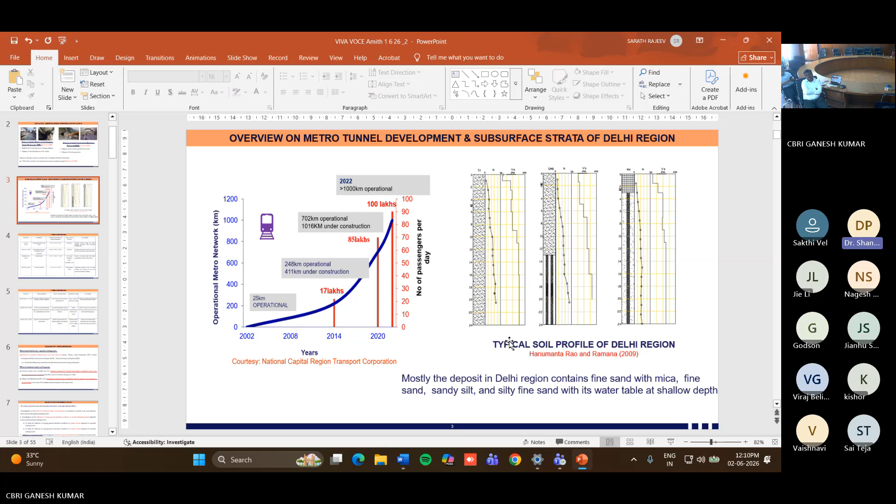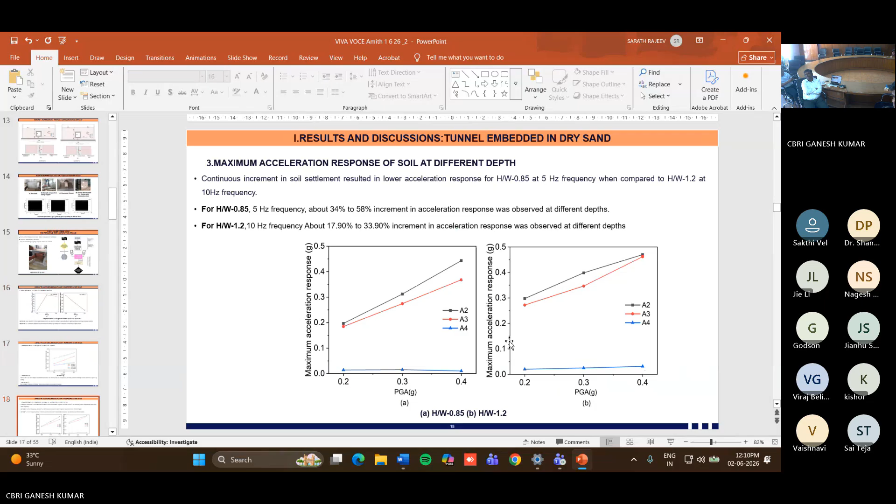I think the primary reason is because the load is acting within the soil compared to the tunnel top. I understand you said that it is becoming densified and so stress distribution is happening, so pressure is reduced.

Huh? That is the point. No? Because your soil is dense soil, so if during shaking it should be loosened and should not be densified. So I was thinking, is it that on the top your soil becomes loose compared to the site? Just observation, yes, I think that is a primary reason, Professor. That I will accept.

Okay, so I am almost at the end. With your years of learning and studying in this particular topic in detail, what will be your design recommendation? Because you started with this, many tunnels got collapsed due to earthquakes. So how will you prevent collapse of tunnels based on your research? Can you give 1-2 points? If we take those considerations, it can be prevented.

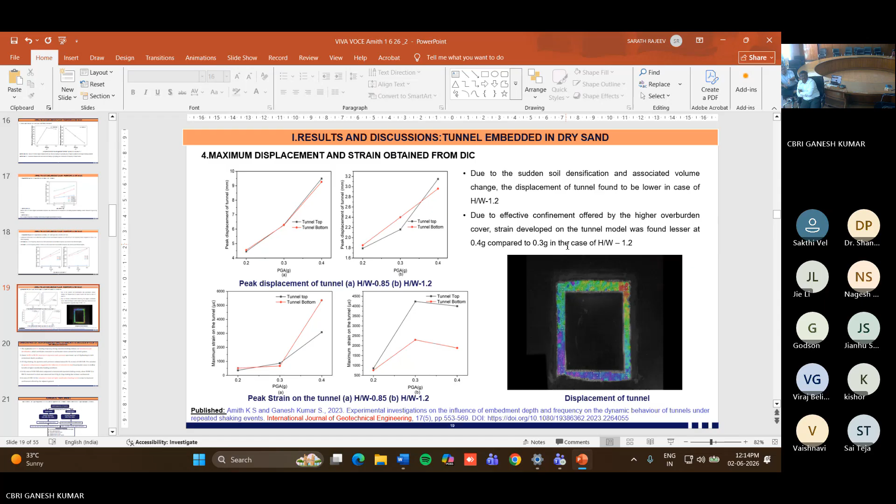Stone column can be used effectively to mitigate liquefiable ground, and specifically, if we look at this case, if I'm giving you this soil or this soil, then you would have a very shallow condition - that is right. When the tunnel is at shallow depth, and when there is a loose ground condition, specifically if it is liquefiable ground, I will go for the stone column technique.

Okay, just one more comment and then I will stop. What is the mechanism that plays in the stone column that improves performance? Just tell in one or two sentences. Basically, when we install the stone column, the surrounding ground will densify, because of which reduction of pore water pressure will happen. And the moment pore pressure reduces, upliftment will reduce.

Okay, those are from my side. If you have questions internally, you can ask. Thank you, Professor Patra. Now I am opening this for the DAC members.

Right? I only figured that you told us that the numerical model part you calibrated with SPT value. Yes. How did you get the SPT value there? Actually, there is one relation between the SPT value and the relative density. So that's directly related to relative density. Here is the empirical relation to go from SPT to model parameters, right?

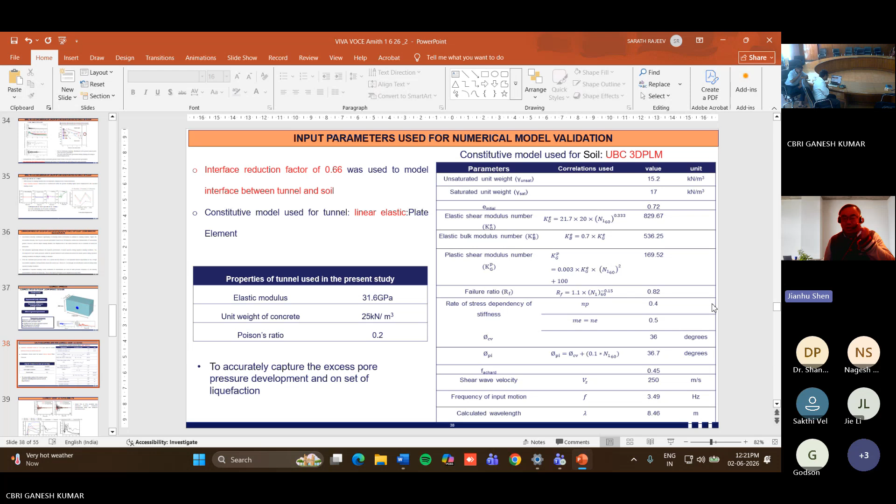Professor, if possible could you please speak louder? Okay, yeah, thank you for giving me this chance. We asked you questions during the milestone at MIT, so there are no more questions from me. I'll just give the chance to other committee members.

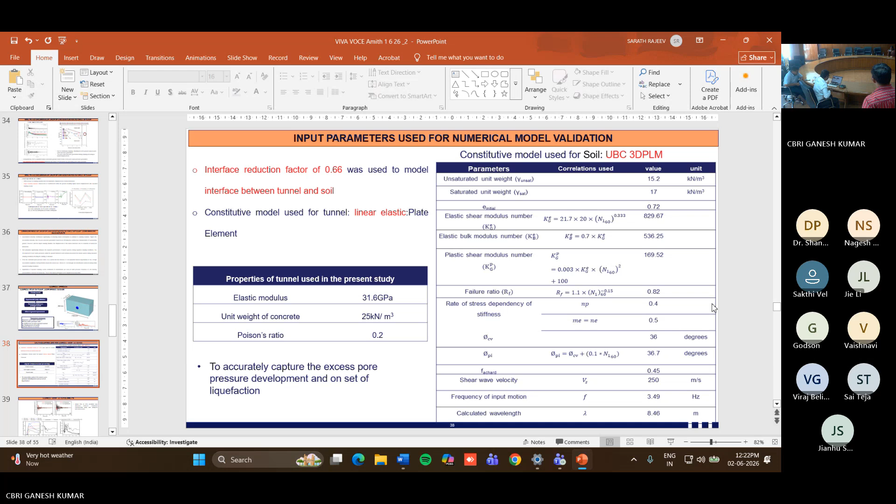It's my privilege, so congratulations, Dr. Amit, for the wonderful work and for your dedication. Keep going like this and contribute more to research and the technological field. All the best.

Huh? Thank you, Professor. Professor Shen and Professor Lee, thank you everyone. Okay. Congratulations, Amit. Professor, I would like to thank you for your support and for coming to my presentation. Thank you. Our pleasure. Thank you. Okay.